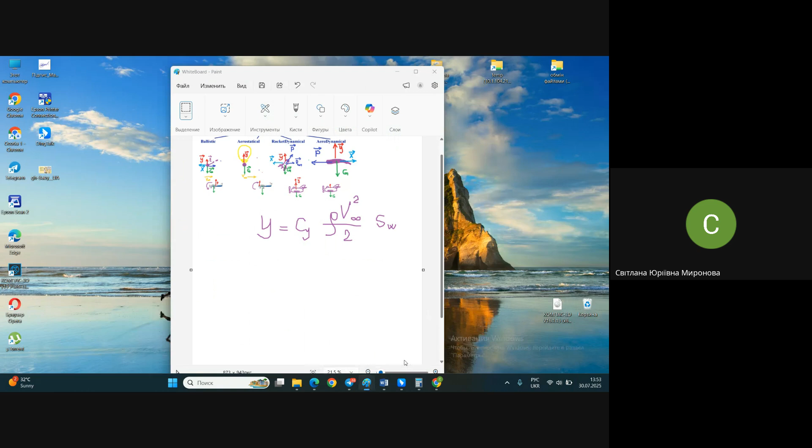But before I start with aircraft engines, I will remind you of one important thing once again - not about aircraft structures, what they look like, and so on, but about the formula of Zhukovsky again. Yes, again - look, I have already written it instead of opening it in Telegram. Please do pay attention.

We also need to recollect the scheme of forces acting on the airplane in horizontal flight. And I hope you remember, in order to continue horizontal flight, the lift force equals the gravity force, the weight. Now imagine the situation that we have two airplanes of the same weight.

One is a speedy airplane - let it be a business airplane or some passenger airplane. And another one is a flying bicycle, let's say an agricultural airplane, which has very low speed, just because such an airplane doesn't need high speed. But imagine we have two equal airplanes by weight. It means that the lift is the same each time.

And what does it mean for us? If lift is the same, what do you imagine? One airplane, the bicycle with wing, flying with a speed of 50 kilometers per hour. And another one - no, not a business jet, it's too slow for that - it's some medium passenger airplane, medium speed.

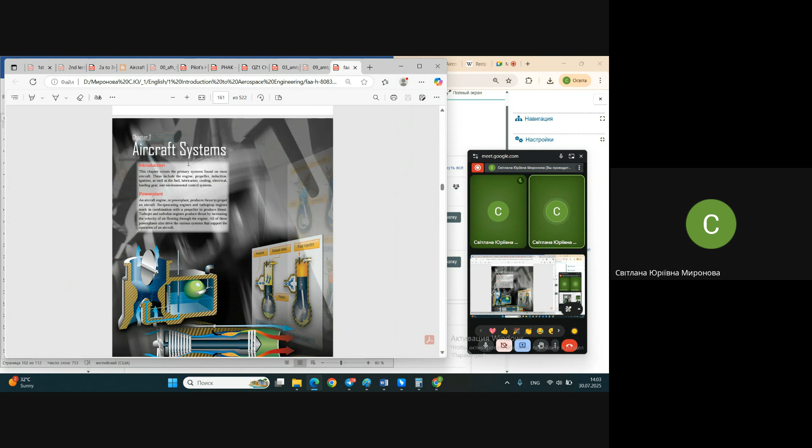The very first, maybe I should open not even this, but somewhere here I have prepared the full version, as I said. Thanks to you, I have found so many books on this subject. Some years ago, when I last had a need to find additional books for my students - no, forgive me, not for me, but for students - and when I've been searching for these books on the internet, maybe not all of these books were in open access by that moment, and I forgot to check sound.

Maybe I'm talking to myself. Forgive me. Certainly not - sound is recording, and what I forgot to check was time. Moreover, I need to write down the time. I did it.

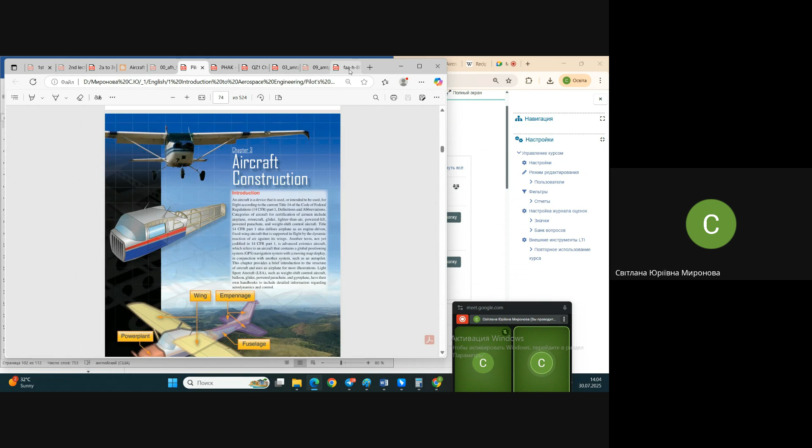Now in free access there is a lot of different literature, and I even found the Federal Aviation Administration portal with free open manuals, books and so on. All these widely illustrated, beautiful books are actually FAA books. And maybe that pilot book that I showed you and gave you before is some kind of short version from FAA books of previous years - no, the final one that they propose is from the 23rd year. You will have it also.

Additionally, I have copied some chapters - not the whole book, but given by chapters - about aircraft power plant, and about other matters. Forgive me that I do not copy everything, just because it's rather complicated to copy everything that I don't need. For you, I think it's enough to have this chapter about aircraft engines and this chapter about propellers. Actually, it's even too much for first years.

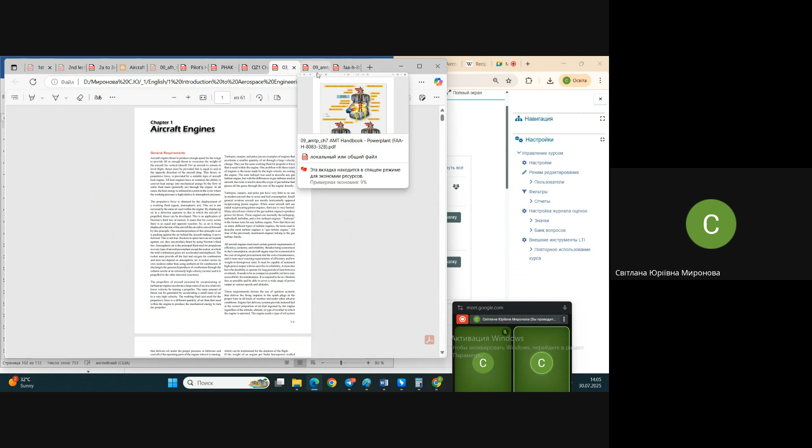But I prefer you have all this literature, these sources of information. Maybe they will be useful for you, or at least interesting somehow. Well, once again, aircraft power plant.

Aircraft power plant is a wider idea, wider concept than just an engine. We understand aircraft power plant as a system of engines and some systems which deal with the engine - for instance, oiling system, engine control system, maybe some pneumatic system, hydraulic system, which is somehow related to the engine.

Plus to this, usually we have an anti-ice system, and in most modern airplanes, an anti-icing system against icing of the airplane in flight is also related to the engine, because some surfaces are warmed up from inside by hot air taken from the engine exhausts, and so on.

So aircraft power plant is a much wider idea than just engines. We are mostly talking about engines with you, but I need you to understand that it also comes about some systems which work for the engine, like fueling system, oiling system, cooling system, and so on.

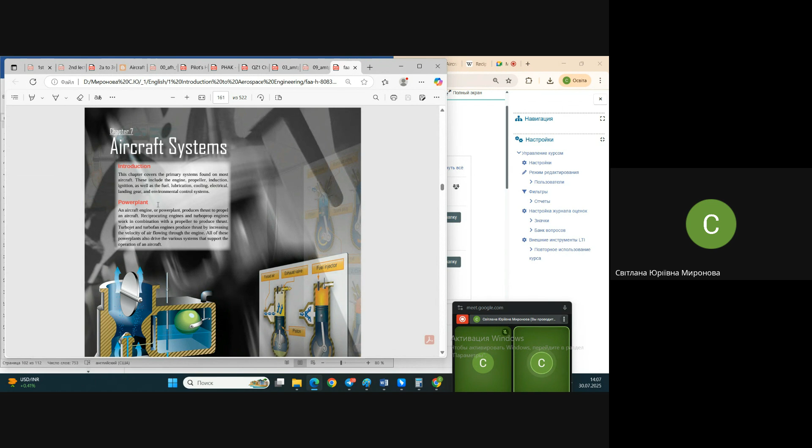Control system of the engine itself, and the engines and the systems which depend on the engine. Usually it comes about the conditioning system, especially in passenger aircraft, and usually it comes about the anti-icing system in passenger and cargo aircraft.

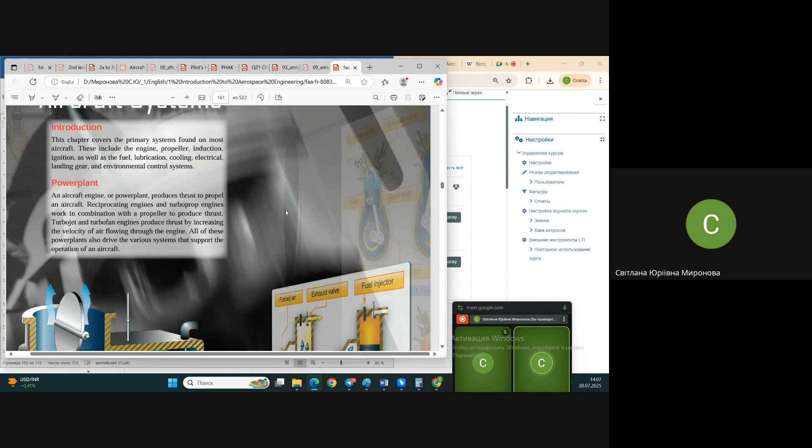Here in this book it's explained that aircraft engine or power plant, they use like a sign of equality between power plant and aircraft engine. It's not quite the same.

Moreover, modern airplanes, you have seen dozens of airplanes, and you understand that modern airplanes usually have some number of engines in their power plant. Why do we use several engines? When it comes about passenger or cargo airplanes...

...it's maybe also because of safety rules. Even ICAO restrictions, ICAO airworthiness and so on documents, demand to have compulsory no less than two engines, and in case of a long range flight over water, like between continents, it should be not less than three.

In case of failure of one or even two engines, the airplane may continue the flight on the remaining engines. The power plant being divided into three or four engines helps provide reliability, in terms that you duplicate, twin, or triple your thrust generators, and in case of failure or breakage of one of them, you may continue the flight and land safely.

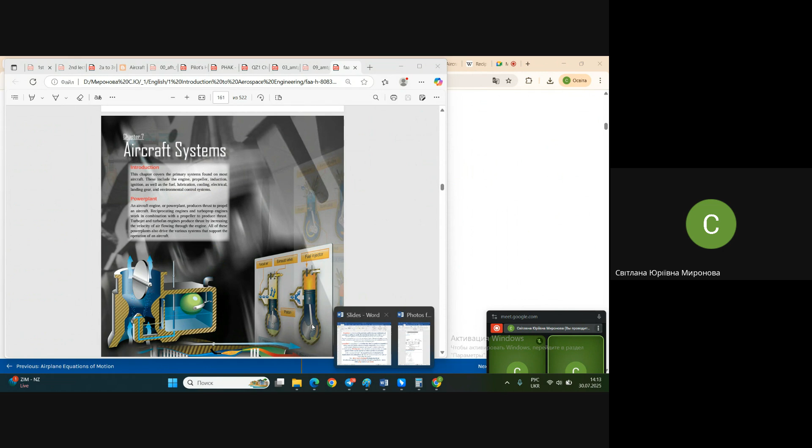As I said, propulsion system and propulsion — propulsion at all, what we understand as propulsion. When we're talking about power plant, it is the aircraft propulsion system used to produce thrust. Propulsion is understood as generation of force, and pay attention, in any combination, either pushing or pulling. So propulsion is a process of generating force to provide some translational motion of the object.

And this, you see, comes from Latin words also — practically it's like 'forward' and 'drive': forward motion, to drive forward. And one more important moment: it's called propellant. What is it?

Some working mass is either expelled from the engine or expanded in such a way as to create thrust or some other motive force. Look at this working mass, reaction mass. What is propellant? It's the mass against which the system operates in order to produce acceleration - some piece of matter, some volume of matter that is used to produce acceleration by way of either expelling or expanding in size, in volume, in order to create thrust.

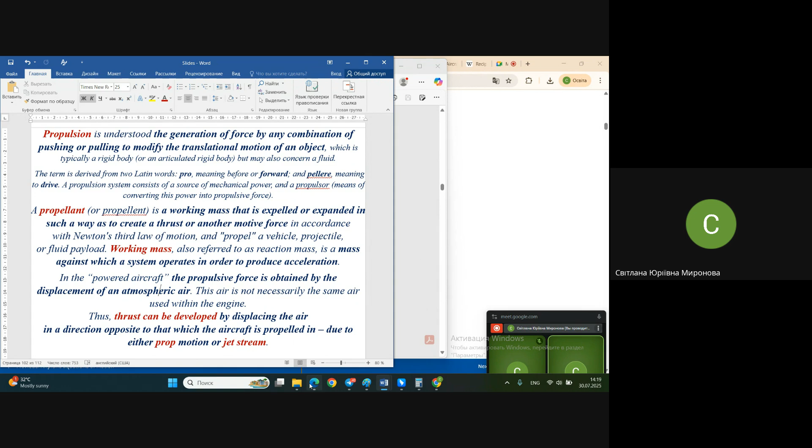Let's continue now with slides. I hope it will be a little less boring now. We will go to classifications, and for this classification, forgive me, I will do some notes in front of you.

Engines - look at this. Time to time I will use screenshots, actually, from the appropriate course of Delft University, somewhere in Netherlands. About 10 years ago I took their videos from an open streaming portal, but after this they mostly hid those videos. But the videos of the real lectures had been in free access, and some photos from these lectures I use in my slides.

Here you see the lecturer in class, and the slides show anecdotes of different types. Later we will see together some of those funny pictures, which are called the dreams of different groups of designers, or dreams of different people as to the airplane - those responsible for aerodynamics, the design group, the manufacturer group, the strength group, those responsible for weapons, for instance, and so on.

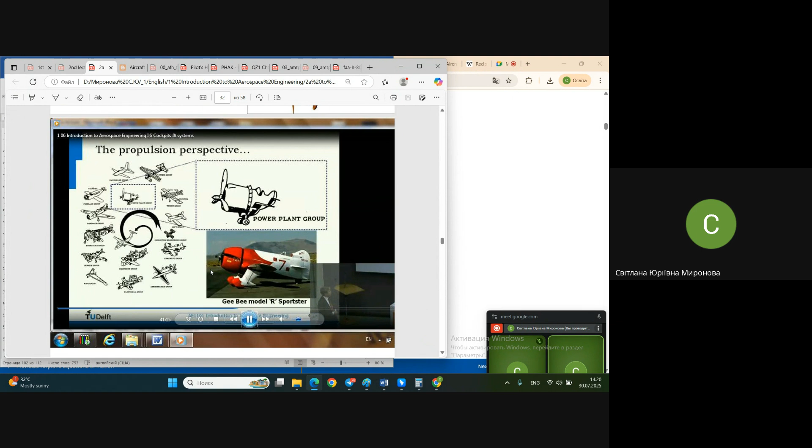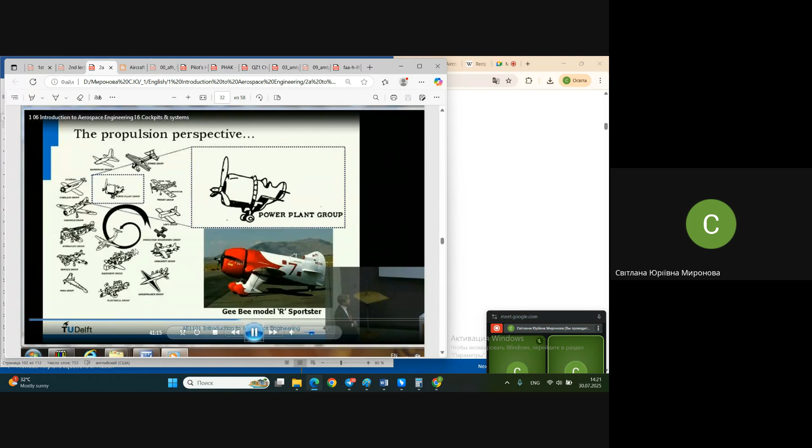Those responsible for the propulsion system, the power plant, of course they would like the airplane to look like this. And the funniest fact is that such an airplane really exists - you see, practically the whole airplane exists from the engine, with a very insufficient wing, even less sufficient stabilizer, and it doesn't look like an airplane. It looks like a barrel with a couple of wings and a stabilizer, and due to this, it may also fly.

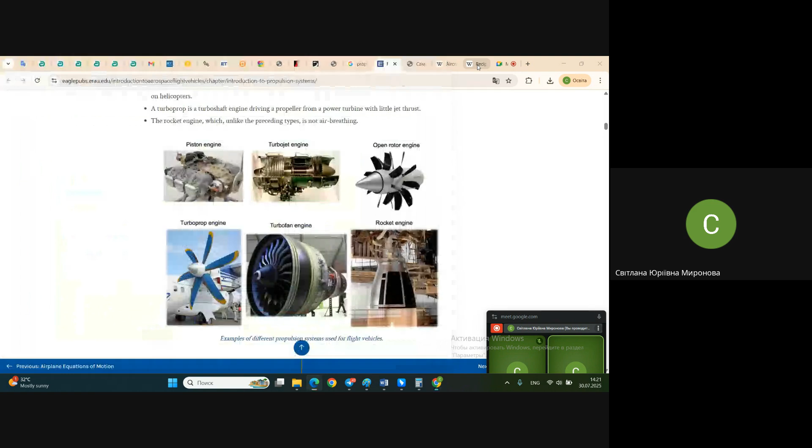However funny it is, I already told you about our engineer Mozhaysky of the 19th century, who considered making the first flight - it's already almost a classic. Steam engine, steam-driven airplane, steam-powered airplane, and his airplane.

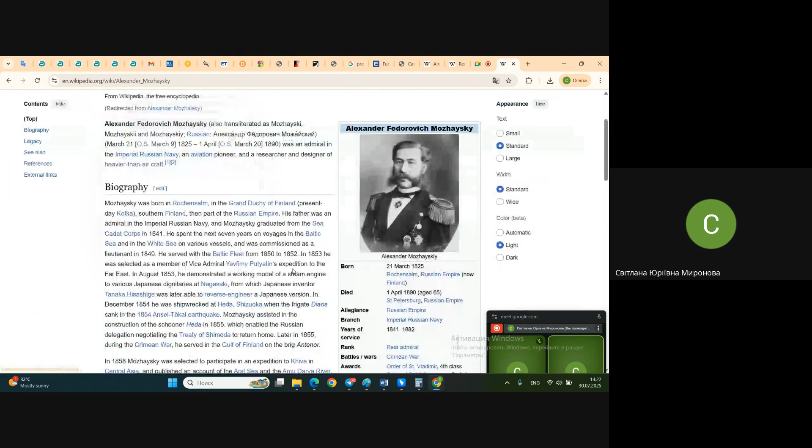It was approximately in the 1880s, something like this, and his airplane used a steam engine. Oh, a photo of his airplane does not exist. Oh my.

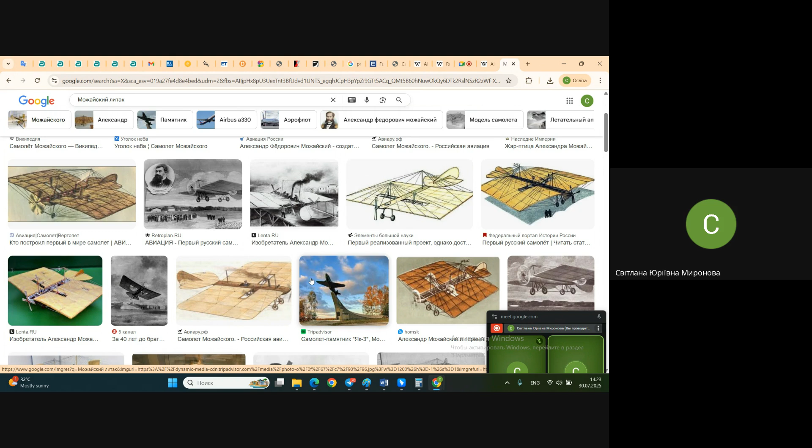Here is his airplane, which in our country is considered the first powered flight. But as I said, his flight finished with a crash, so it was not successful in the modern understanding. The Wright brothers were the first to make a successful flight, and their airplane really was the first that looks like a modern airplane.

By the way, about flying bicycles, look at this. Remember what I said, that in case airplane speed is low, the wing will be huge. This is the RC model of Mozhaysky's airplane. After almost 80 years, it was proven that this airplane could fly - they repeated it in a scaled model, stuffed it with an electrical engine, and it was able to fly normally.

But look at this airplane, what do you see right now? It's very similar to a steam machine, a steam train. It has pipes, smoke, and so on - something very unusual, because it was a steam engine flight. But this one was unsuccessful, as we remember. So steam engines are not really usable for flight.

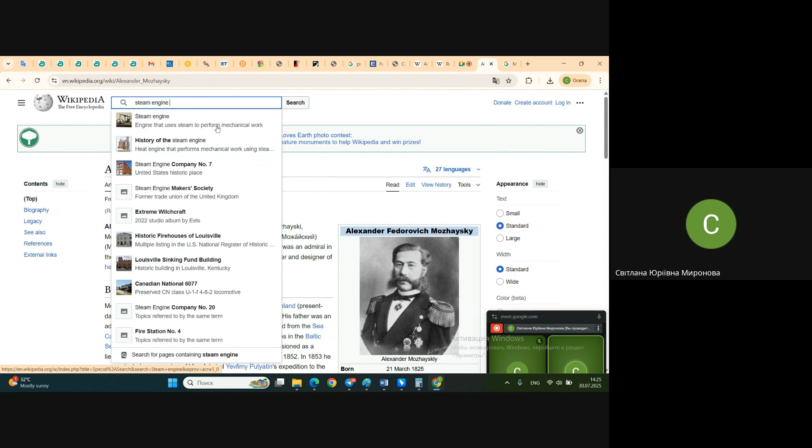Wait a second, I closed it occasionally - those pages with illustrations that I had opened for you. Wait a second. Steam engine, steam engine airplane - I don't clearly remember how that page was called.

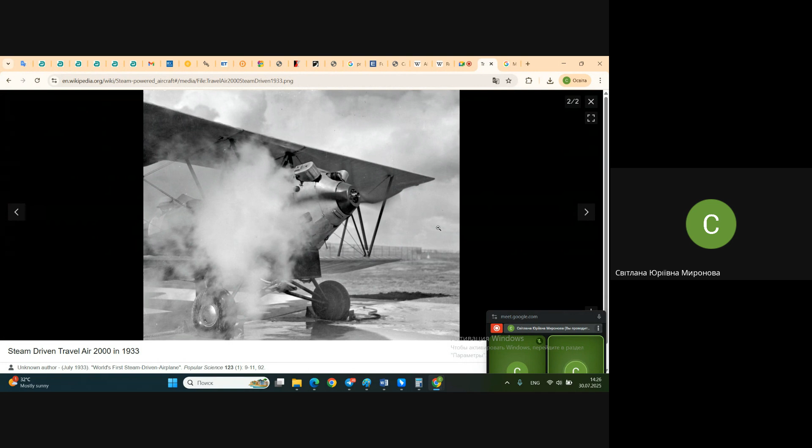What, steam powered aircraft? Yeah, I just opened it a second ago and already forgot. Now, what was a surprise for me when preparing for your classes - I didn't remember this fact, but steam driven airplanes existed and were even in use for some years. It wasn't just one flight this airplane made. It's called the Besler Brothers airplane, which really was a steam engine.

It was a real steam engine, a machine that worked on water, steam, practically on hot water. The advantages of this machine were, among others, that it was practically not noisy and not harmful. Well, of course it was harmful anyway, because to get steam they had to burn some other fuel to heat up the water and make it boil in this heat machine. So anyway, it comes back to the carbonizing of our universe, but whatsoever, these drives existed.

So let's try to start our classification of engines. Again, nothing visible. Let's try another one. Stop making me crazy, my dear computer. Please don't shame me in front of students.

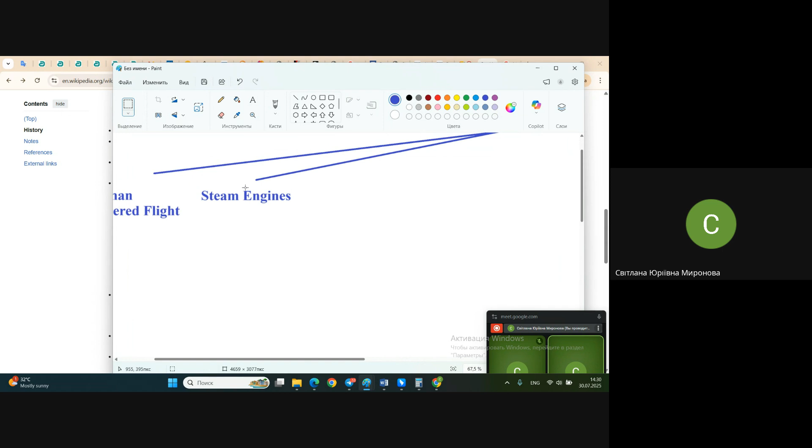Why? Because the steam engine is actually too heavy. We may not quite understand what that means, but recall what I've been saying about the principle of mass minimum - an engine should be light enough while providing thrust, in order to move itself and the machine it's placed in. In case an engine provides insufficient thrust with respect to its own weight, it's called non-effective in this meaning - non-effective in terms of the weight of the engine. This ratio of thrust given by the engine to the weight of the engine should be as big as possible for this engine to be used for providing flight. But steam engines are considered non-efficient in this meaning - they are too heavy with respect to the thrust they produce.

Next, look - next in history came the group of air-breathing engines. But right now, let's leave here the place for electrical engines, which are in fashion now.

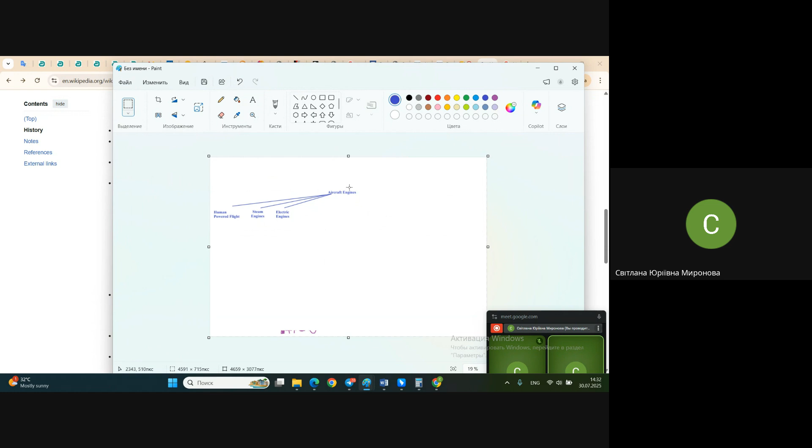Internal combustion engines, and these engines are actually a big group. But let's draw a line here first, and this line we will call air breathing engines.

And there is another type of engines. They are not used in airplanes, usually. They may be used in airplanes, like additional engines for accelerating during takeoff, for instance, but of course they are not used in cargo airplanes and passenger airplanes. Mostly those types of engines are used in rockets, especially in space rockets and ballistic rockets. It's just the name of such an engine: it's called rocket engine. It may be used in an airplane, as I said, like an auxiliary engine for takeoff, for instance.

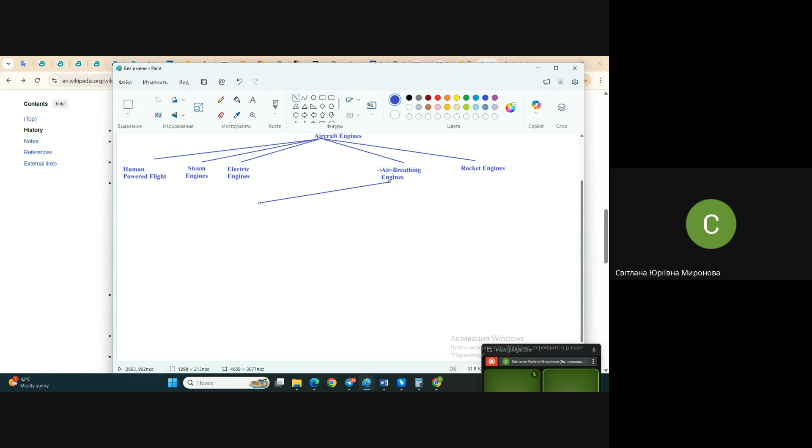There are two names for this group of engines: one is more scientific-like, and the most common, of course, is, as I already said, piston engines. Why pistons? Because of their design. Piston engines. Piston engine—oi, oi, oi, oi, where are you?

Piston engines. Maybe I will not... I will. But a clever woman may already have copied down this word half an hour ago. Piston engines, piston engines—and piston engines also may be divided into some different types of engines. Actually, when it goes into this classification, we will go far.

Next, jet engines. The next big group is jet engines. And this big group—actually, I should write these as jet engines. Maybe I'm wrong, I should write jet engines already here. But again, it's not completely correct. So these may also be considered jet engines, but not all the engines in this group are considered jet engines. Do forgive me.

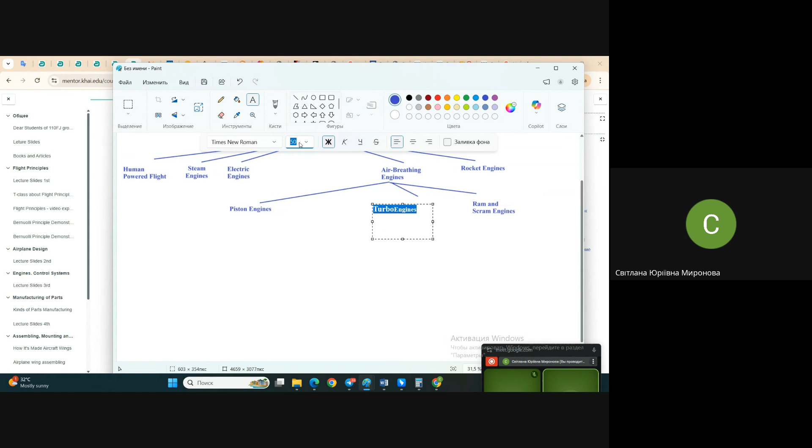Turbo engines - what does it mean, turbo engines? It means that they have a turbine, turbine-like devices inside.

Turbo engines start with the so-called turboprop engine. Above all, it comes from the really clean turbojet engine - in English it has such a name. The first in this group of turbo engines, turbo gas engines, they are called turboprop engines.

Let's type it. Turboprops, similar to them.

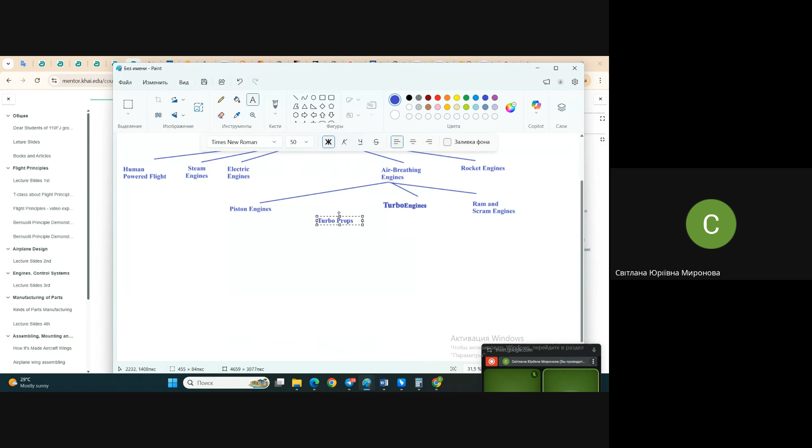Turbo shafts, which are actually quite the same engine as turboprop, but the prop is not in front of the engine. The shaft goes out of the engine from the backside, and the shaft is joined to the prop on the backside, with a special reducer. This reducer rotates the shaft 90 degrees, changing the direction of movement. Due to this, the engine may be used for helicopters.

Turbo shaft engines here, turbo shafts - very similar to turboprop. Don't mix them up. Turboprop may have the propeller in front of the engine or behind the engine. In one case it's called a pulling scheme, in the other case it's called a pusher scheme. It's just the same.

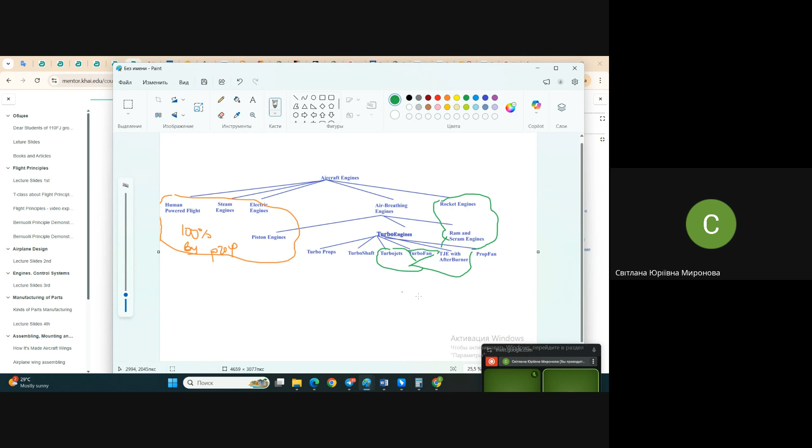What about air breathing engines? Rocket engine, ramjet engine, afterburners. Maybe we need to exclude the prop fan. Afterburners and turbojets. Actually turbofans are easier because they have no open prop. The fan is hidden, it's ducted in a special channel. It looks like a huge prop with a lot of blades, but it's hidden inside the cowling of the engine itself. And here we have around 100% of thrust already by jet stream.

When it comes to turboprop and turboshaft, it's a combination. I was said, I can't find it elsewhere, especially in English literature - maybe I was just not searching well enough. But I do remember, and it's given in our literature, that around 30% of thrust in turboprop engines is given by the jet exhaust, and around 70% by prop. When it comes to turboshaft engines, their exhaust is practically not used for providing flight. In this case, either 100%, depending on engine design, or around 90% of thrust is created by prop - not less than 90%, only due to rotation of the prop.

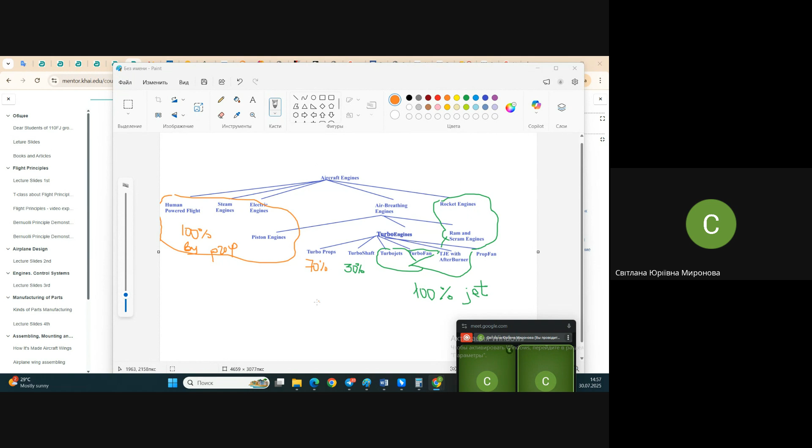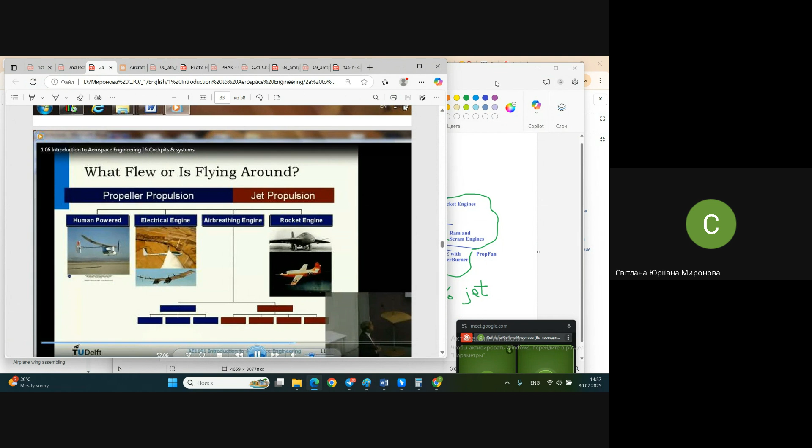Where is our program with slides? Once again, let's compare what we did with the slides that you have already seen.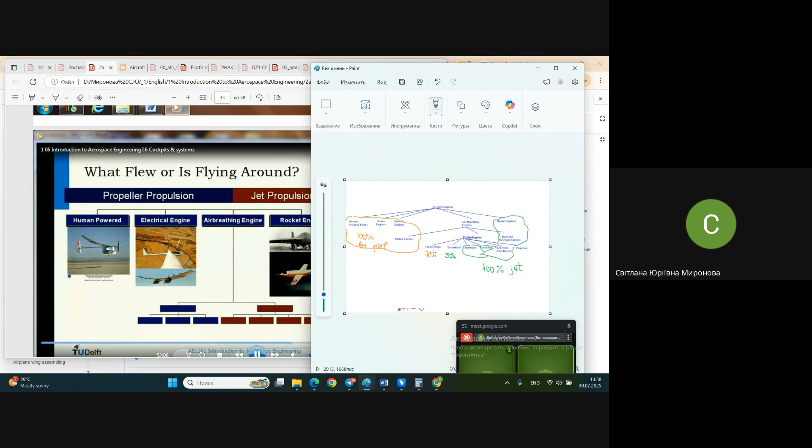Propeller propulsion and jet propulsion. Propeller propulsion may be powered by human power, steam engine, electrical engine, piston engine, and even turbojet, turbo gas engines. I should have written turbo gas engine here to understand better. These turbo gas engines include turboprop engines and turboshaft engines, hidden inside turbo gas engines.

A similar diagram was made by the lecturer in that university. Red color is related to jet propulsion, and you see how he explained it - maybe he needs to change color to red here. Rocket engines are jet propulsion, and air breathing engines belong to one group or another. Either it's a prop responsible for creating thrust, or it's jet stream responsible for creating thrust, or their combination.

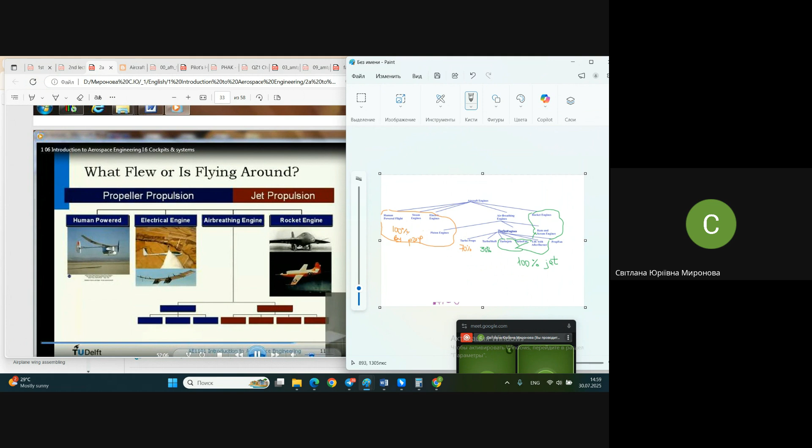Let's see air breathing engines. Once again, remind you, we have also such a level, air breathing engines. Some things you already know, piston engines, and next we have turbo gas engines, represented first by turboprop, turboshaft, turbojet, turbofan. Maybe I need to place it in such an order.

And the next group of air breathing engines are ram and scram engines. In our understanding, it's the same engine, but in English they use two different names, two different modes, two different ranges of speed for such engines, depending on their inner shapes of diffuser, confusor, and other matters.

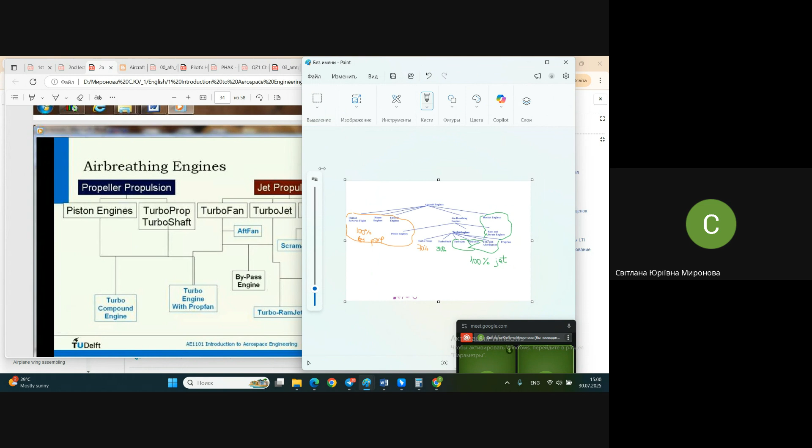Why do you not reduce it? It's decided that it's already too little, maybe. No, this program is not reducible properly.

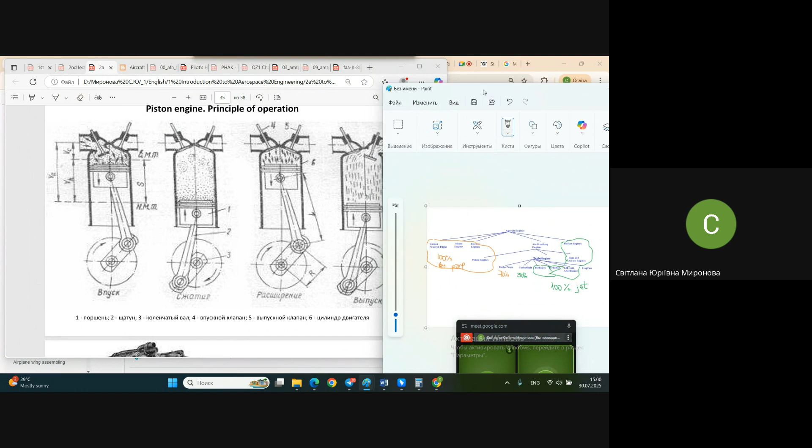Very well, here you see the slide with explanation of the operating of this reciprocating engine. I can't remember, can't study this word by heart already for maybe 30 years, and practically I have no hope to pronounce it properly - reciprocating engine, reciprocating motion should be said. And how does it work?

What it looks like - I have found, thanks to those who developed them, bright slides here. Aircraft engine, here is piston engines. I thought I had more. Piston engine here, it's represented in a picture. I've seen somewhere the animation of this, wait - attention guys, sorry, I thought I had prepared everything.

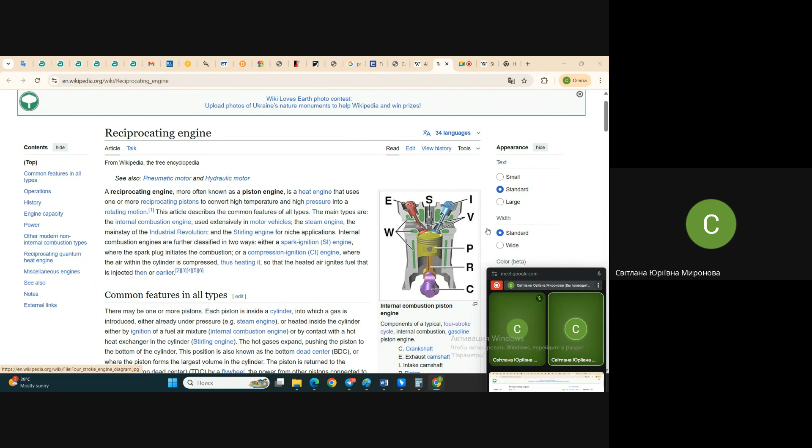The internal combustion engine, or piston engine - oh my, ah here it is. That one was also opened separately but disappeared, maybe I closed it. Right now we see animation. It's maybe not so boring for you as slides, for your new generation, children. Look at this, what it consists of, this engine.

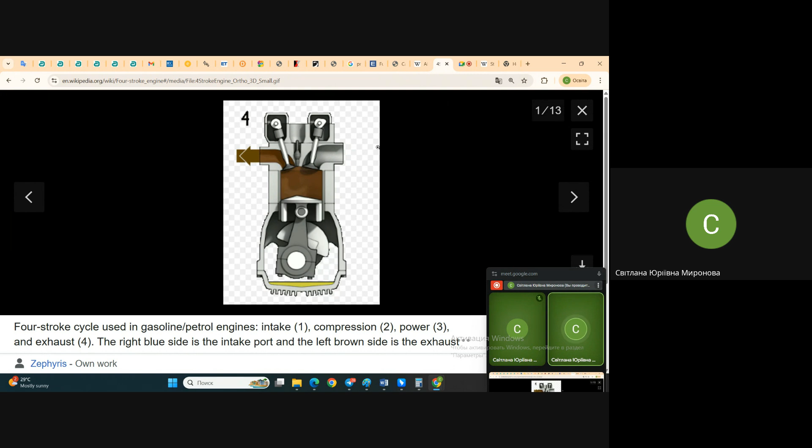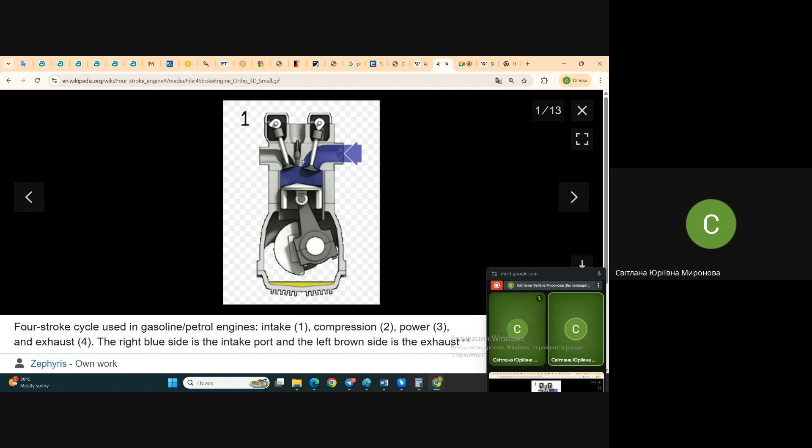We see one element, one piece of this engine, one combustion chamber. Actually, this engine completely consists of a combustion chamber, but it has some communication to the air. On one hand, it has an intake channel, as you might see in this picture, on the right. That one is the so-called intake valve, which is responsible to close and open the duct for intaking the air, for sucking in the air. As soon as you intake the air, here is the special ignition device, which sparks from time to time.

Is it possible to stop it? No, seems like not - it's possible only to continue with it.

This intaking air is mixed with the fuel - a special device, another device, creates a mixture of air with fuel. This fuel-air mixture is combusted, ignited with sparks of this ignition device, and as a result, after burning, the air becomes very hot temperature and changes in volume. Changing of volume of this air results in the reciprocating of the piston, of the engine piston.

This device, the engine piston, results in the motion down of this piston, and the piston itself, by an additional device, is joined to the so-called crankshaft. So you see this device move up and down permanently, and due to this hinged joint, it's possible to rotate the shaft. Next, at the end of the shaft, imagine that you finally have the prop, and the prop makes our thrust, taking the air and dropping it back opposite to the flight direction.

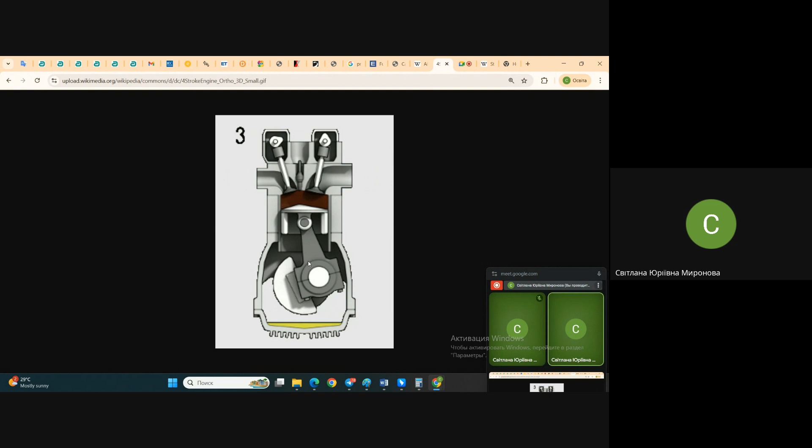It seems like very simple. The question is only - is it enough to have one combustion chamber or not? Certainly it's not, and that is why usually those engines that we see with only one combustion chamber, like this...

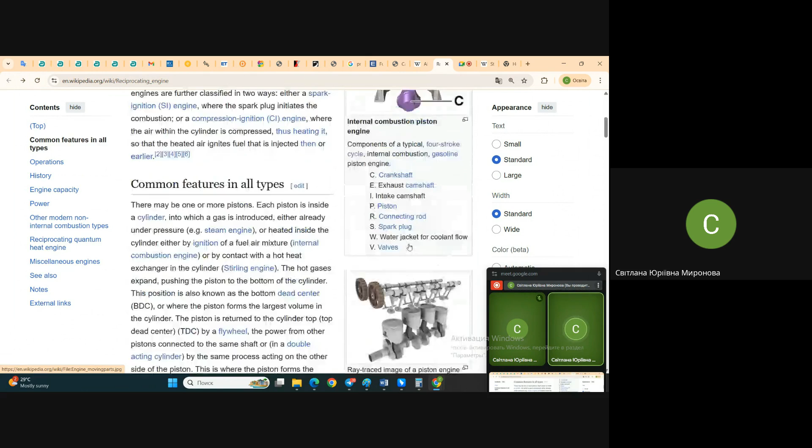That's only part, but it's not the whole engine. The whole engine normally consists of several such combustion chambers. You see the piston is inside one of the combustion chambers, with the rod and crankshaft, which we've shown already in animation. You see these combustion chambers in blue. Pistons rotate the shaft, and here we have the prop.

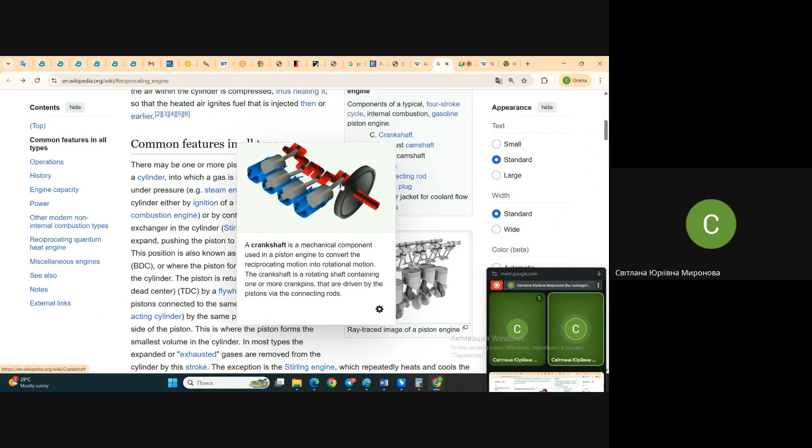What is interesting for us? You understand maybe that they may be different by cycles. There are two-stroke engines, four-stroke engines. Moreover, there are other types of cycles at all. Usually we use these gasoline engines, as they are called, maybe two-stroke, maybe four-stroke. Four-strokes are more effective and more powerful.

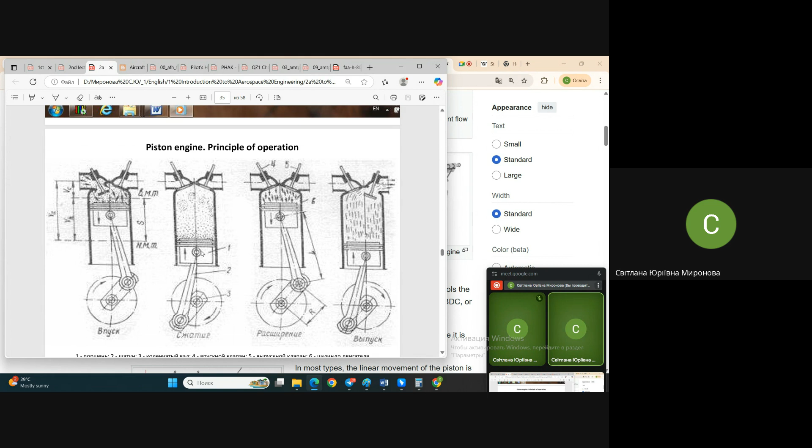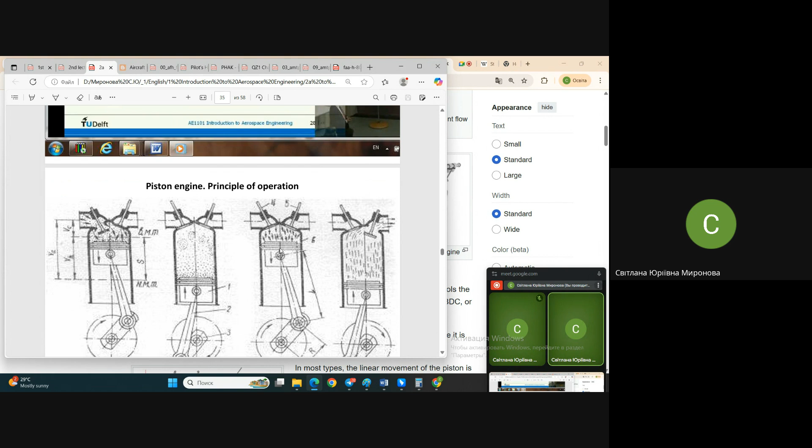What is given in the slides here is quite the same as what we have seen in the animation. It's explained as intake, next compression, next ignition, then expanding the air in the chamber, motion the piston down, next in contrary, opening the exhaust valve on another side. Here the slides are mirrored, let's say, because usually intake is shown on the left and exhaust is given on the right, but in that animation it was mirrored, so you see intake here, and here you see exhaust.

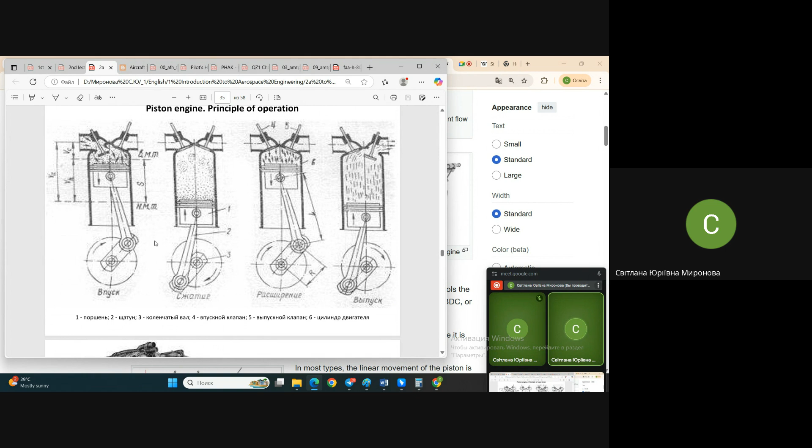Finally, everything happens in one cycle. It's one cycle, but this cycle is repeated some number of times per minute, quite clear. And there is not just one such combustion chamber, but several of them. Typical positioning, typical placing of these combustion chambers for different engines, we see right now.

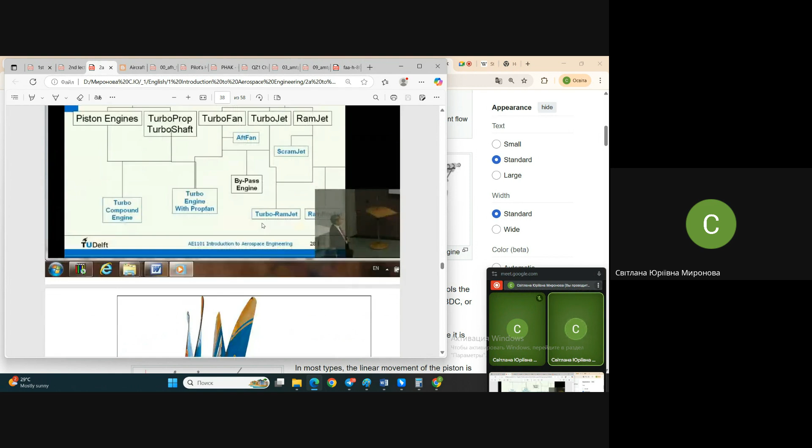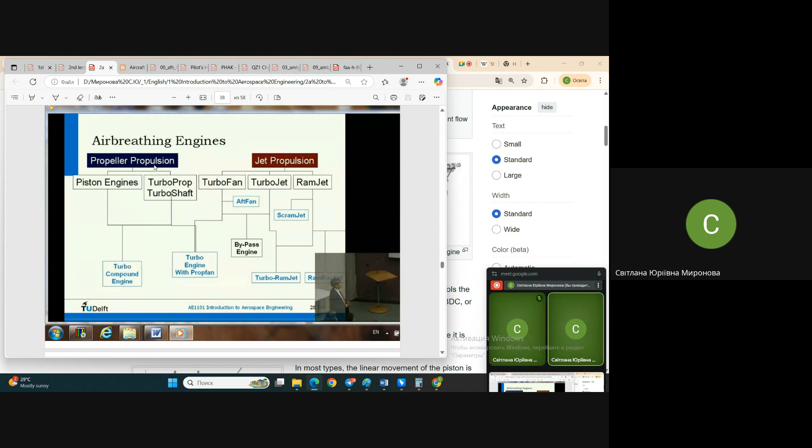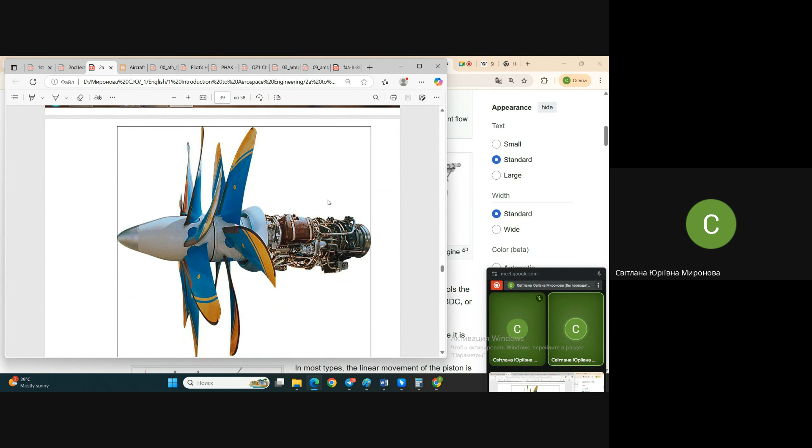Well, next group of engines, this is called propeller propulsion with piston engines, they're here. The next group of engines also uses a prop. They look like this, but do pay attention to how distinguishable the appearance of this engine is. Here is the engine, pay attention, here is the engine, and here is the engine of piston type.

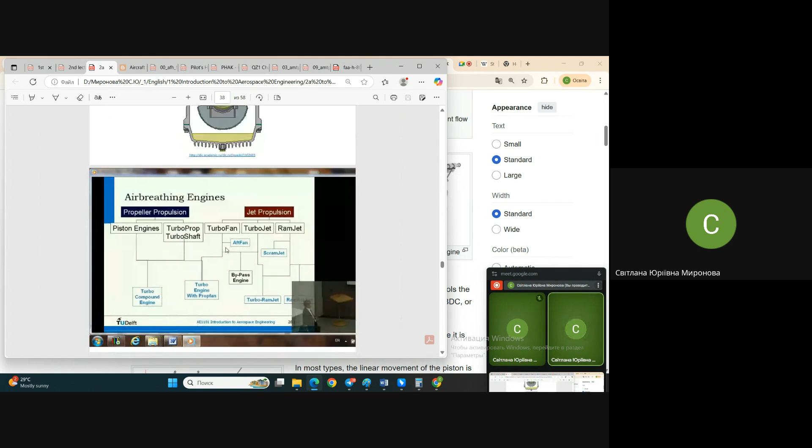What should I say - really, here is its engine with prop. This prop is not so big. Normally the proportion of prop diameter for this engine is much greater than the diameter of the engine itself. So the engine is comparatively little, but these prop blades, their length, approximately for a modern airplane, each blade would be approximately the length of a human's height. Do you imagine those sizes?

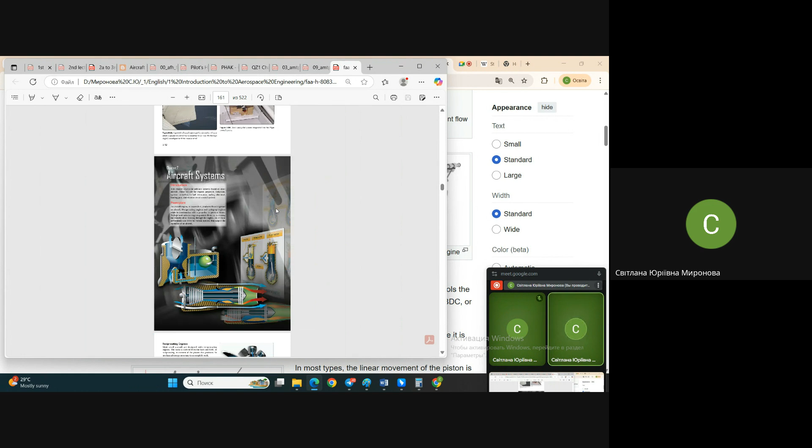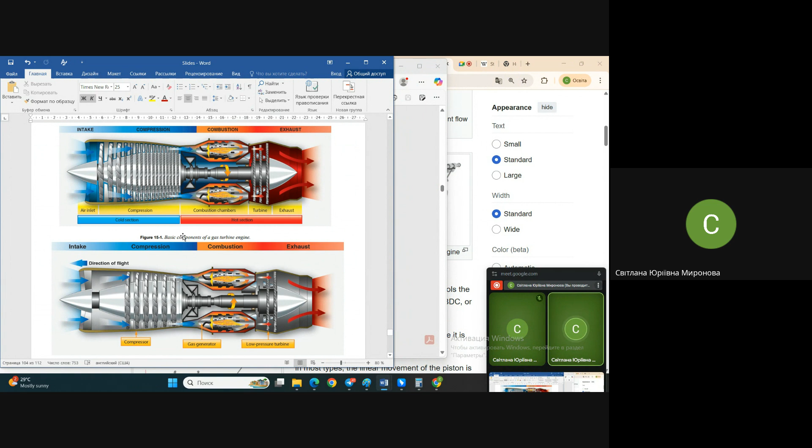What is inside such an engine? Let's go to the book, help us please to see the pictures. Actually we have these pictures in other slides. I've prepared it, but anyway I would like to use my slides to show you, and I would use something to draw while explaining, because what do you see right now? You see two different types of engines. You see the difference? Do forgive me.

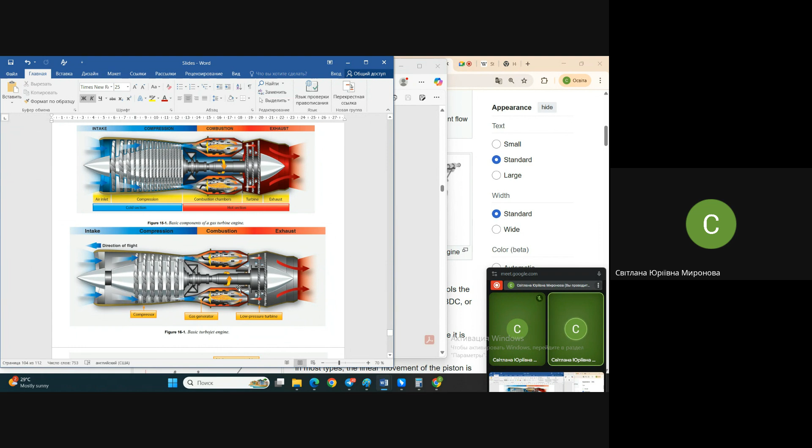Like a gas turbine engine, a basic turbojet engine looks very similar. There is a difference, but we don't notice it. And here is one more type of engine, the so-called turbofan engine. Do you see the difference? It seems like it's fatter, wider, this engine. Yes, because really the engine itself...

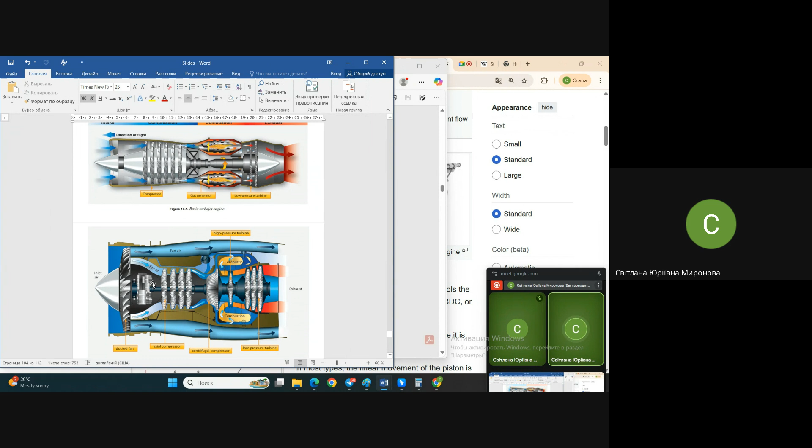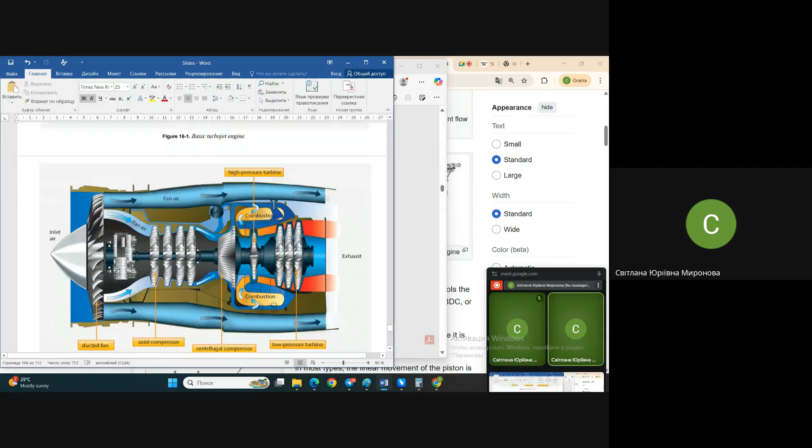Compare this picture, for instance, and this picture. The engine itself is hidden inside. Here is the engine that we have seen previously, but this engine is surrounded with additional cooling here, and in front of this engine we have an additional part called a fan - turbofan. But in contrary to... let's look at the turbofan, in contrary to what I did - I know what I did - in contrary to this engine, it has much more blades at all.

It has a greater amount of blades here, but these blades are much less in diameter. The length of each blade is much less, but anyway they are huge also, especially for big airplanes. Whatsoever, this fan size is more compact than the prop size for an engine of the same thrust. I'm not talking about other differences right now, that they're not usable in the same area of speeds and altitudes.

They have different fields of application just because of prop limitation. The prop may not be used in more speedy airplanes - actually, the prop may be used only up to approximately 0.7, 0.8 Mach number.

The size of the prop is too great on one hand, and the loads on the prop will be too significant. Moreover, the downwash of the prop itself will not be subsonic, and in this case the prop becomes not effective.

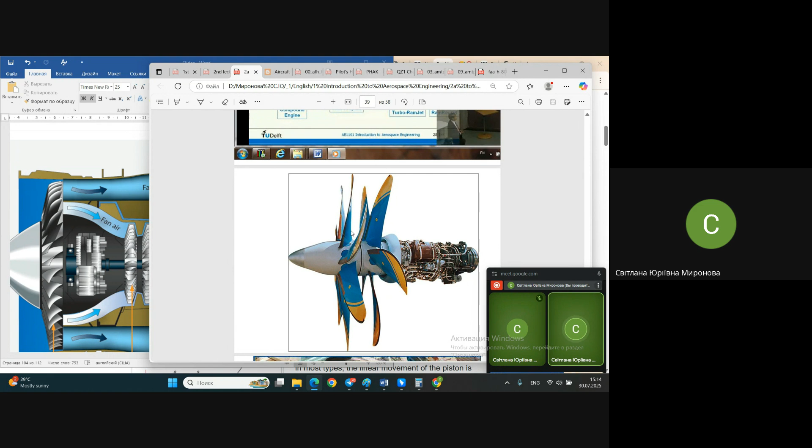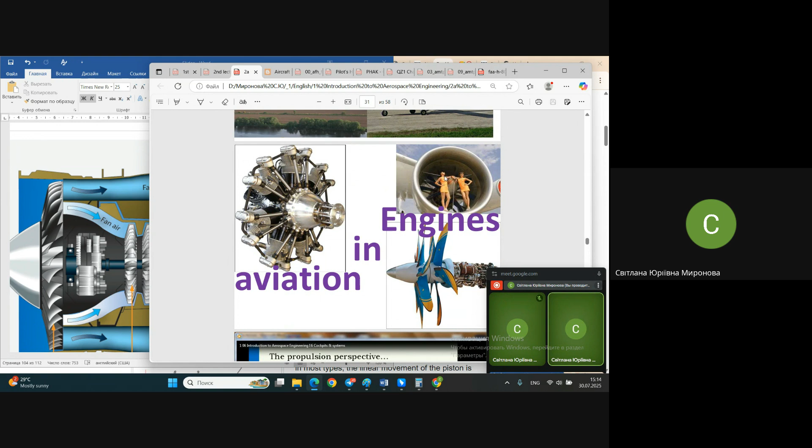To explain it in the simplest words, look at the engine called turbofan. This was one of the first turbofan engines, and these two young ladies are stewards from one of the first flights of the Boeing 747, where I took this historical photo. To compare the size of the engine to human height, you see the girls are standing inside this place, and approximately here is human height.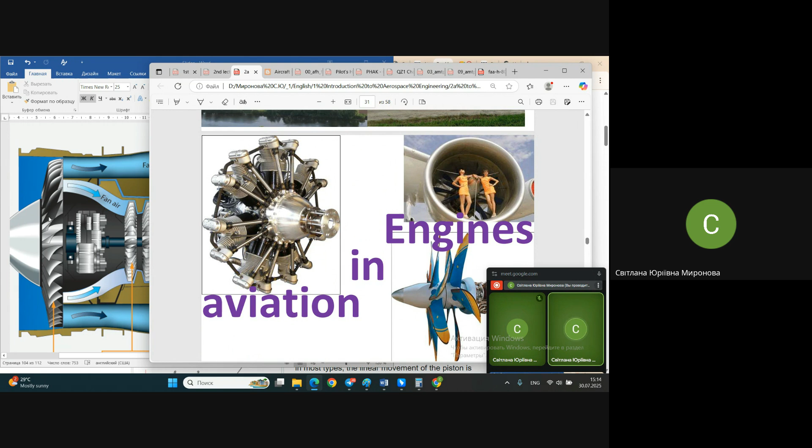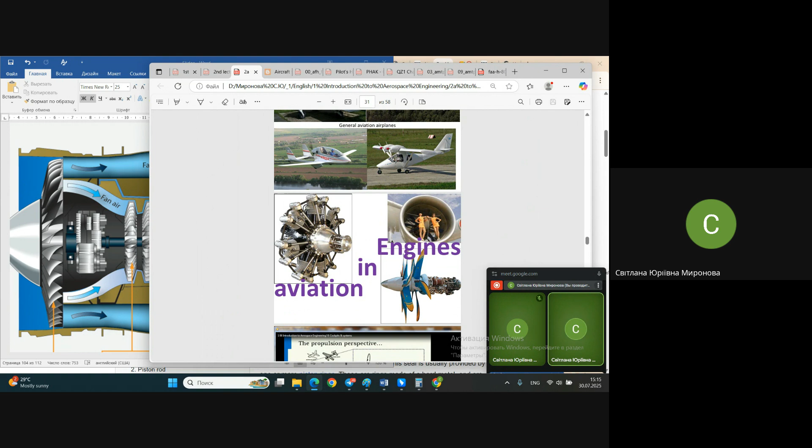But an engine of prop type, in this case turboprop engine, will have an even greater size. The engine itself will not be so big, but the prop will have a much more significant diameter for the same thrust. But once again, remind you that this engine is barely able to provide the same speed as a turbofan engine, because the prop itself is a limit in this case.

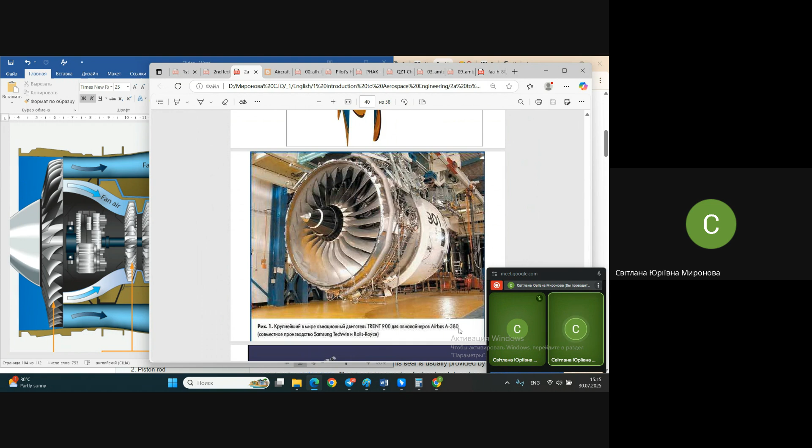Now here we have seen the same engine, and here we see a turbofan engine. It's the Airbus A380 engine. And examples of those engines, there's also a turbofan that is open fan, or unducted fan, or prop fan. It's considered like a hybrid of turbofan and prop engine.

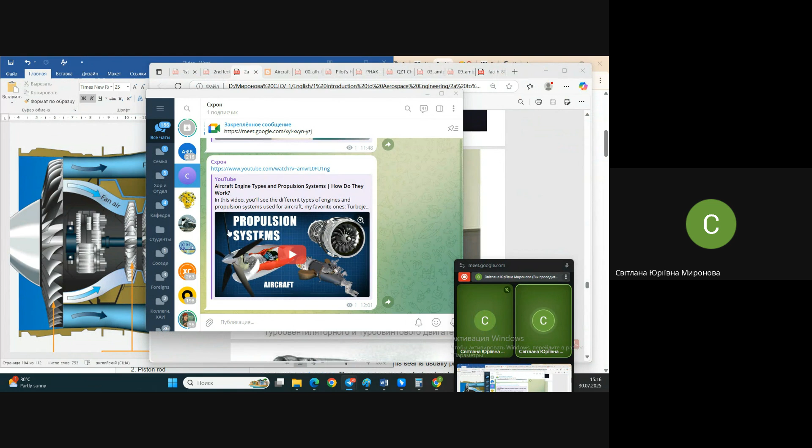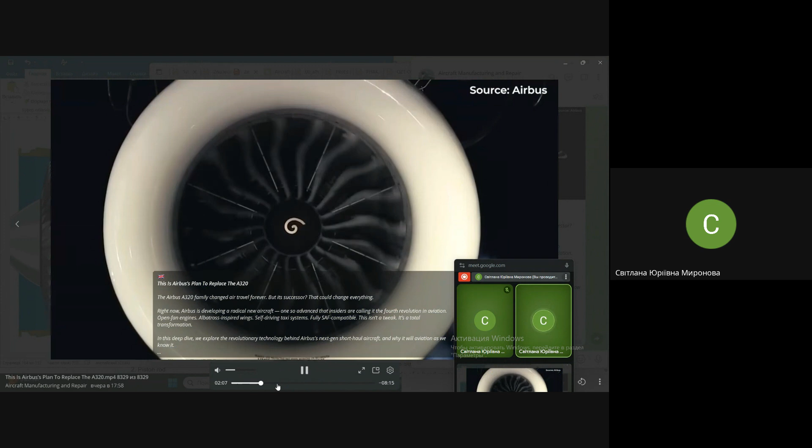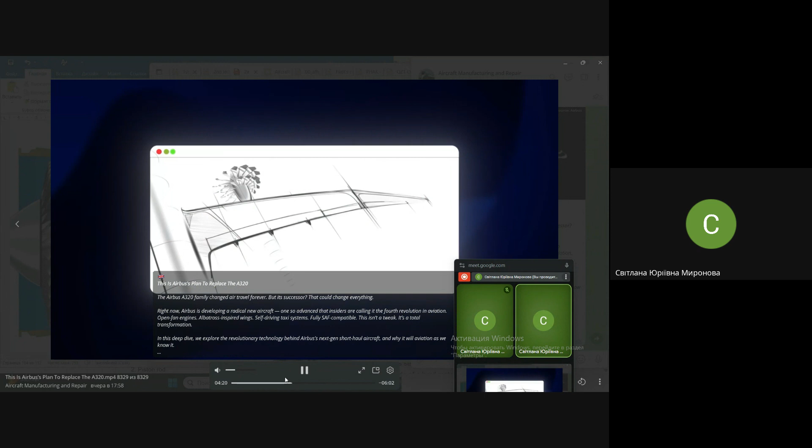You will watch it additionally - this turboprop, what it looks like. In this case it's directed - you see like a tractor scheme with props in front of the engine, and in some cases it's directed backward.

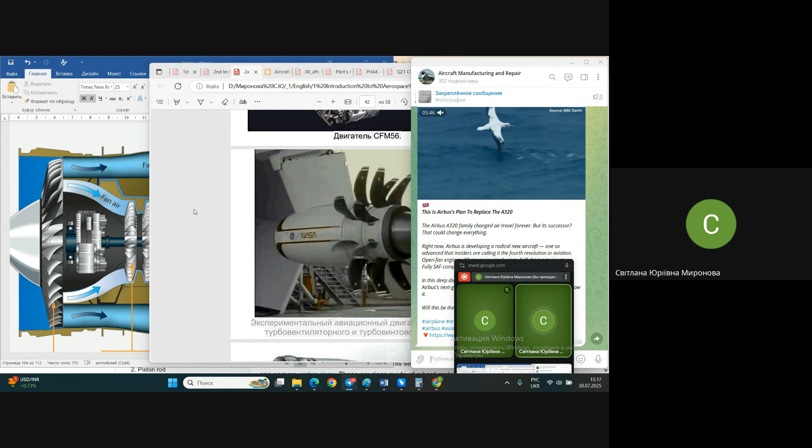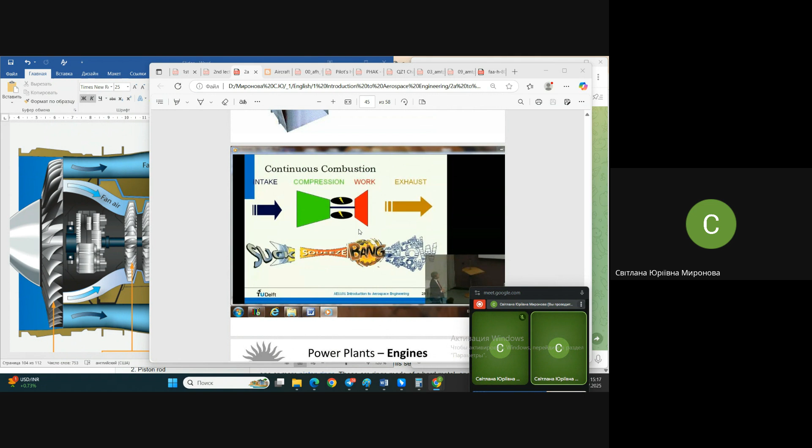Watching the time with one eye, I understand that I was too slow again in explanation. So instead of showing you some pictures of engines, let's try to explain in the simplest way what happens inside the engine, their peculiarities and their fields of operation, after a short break in order to have different classes.

Do take a look at this slide. This is maybe the best explanation ever I've seen about turbo gas engines at all. It's a primitive scheme of the so-called continuous combustion in a turbo gas engine.

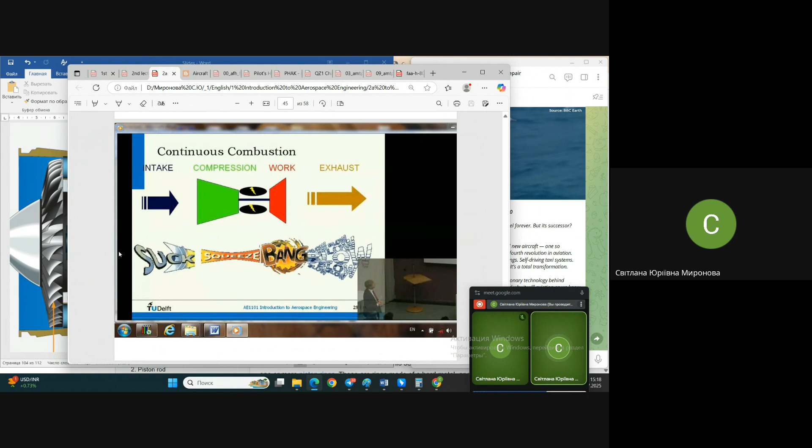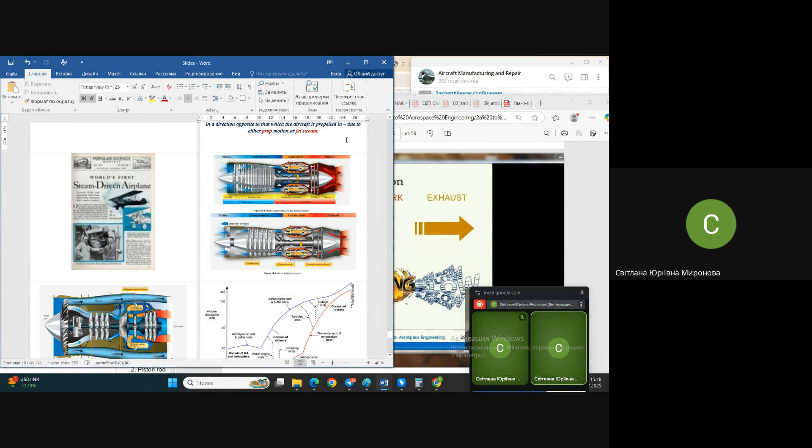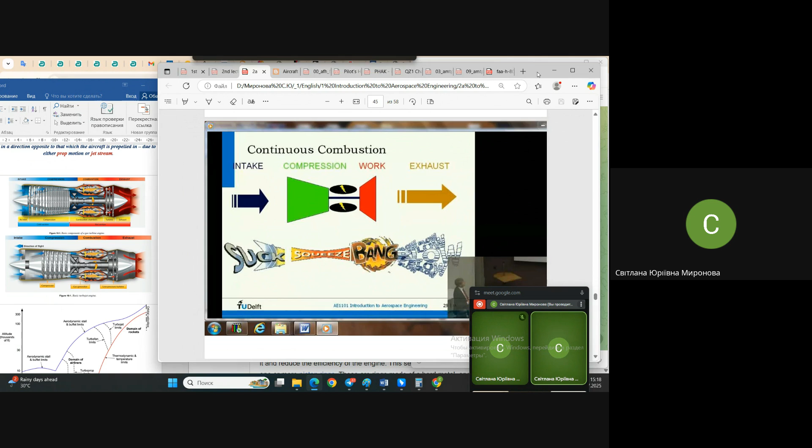Intaking the air - here is the engine. Along the engine we have devices which are responsible for this. Let's use the picture of engines if possible. So you see, along the engine we have a device for intaking the air. It's like sucking air inside.

Next is compression of air. There are devices here called compressors. Next you have the combustion chamber, and after the combustion chamber we have exhaust.

The exhaust is in a channel of special shape, as you might see, and due to this the air being exhausted has much higher velocity and higher pressure. It's really expelling with very high speed from the engine, and due to this, this expelled air pushes us forward.

What I said, the best explanation ever - look at this: suck, squeeze, bang, blow. The engine really sucks, then squeezes - air is squeezed through the engine. Bang - it comes to the combustion chamber, and really it looks like an explosion. And next it's blowing out of the engine, like spitting out the engine with very high speed.